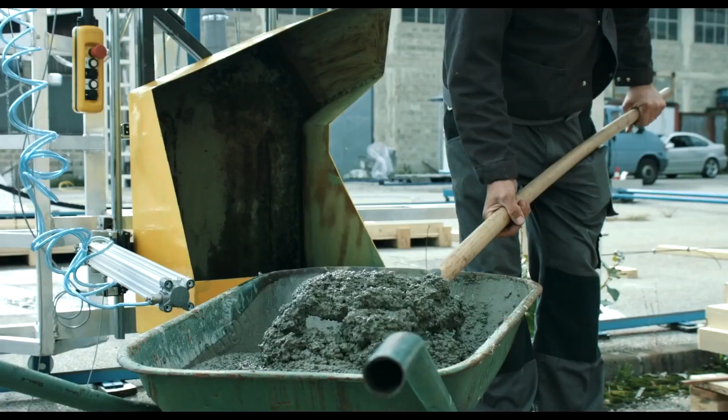The instinct to build a home is a fundamental trait shared by all living creatures, from the most complex mammals to the tiniest insects. Yet, despite man's remarkable capacity for innovation, the core principles of home construction haven't changed since the Middle Ages. It's astonishing that we, as a civilization defined by progress, have not revolutionized the way we construct our homes to become more cost-effective.

However, the future of housing is on the brink of a radical transformation. With a growing number of companies embracing 3D printing technology, the traditional methods of home construction are about to become obsolete. In this video, we'll have a look at how rapidly 3D printed houses are becoming the new normal, and the way we live and build is about to change forever.

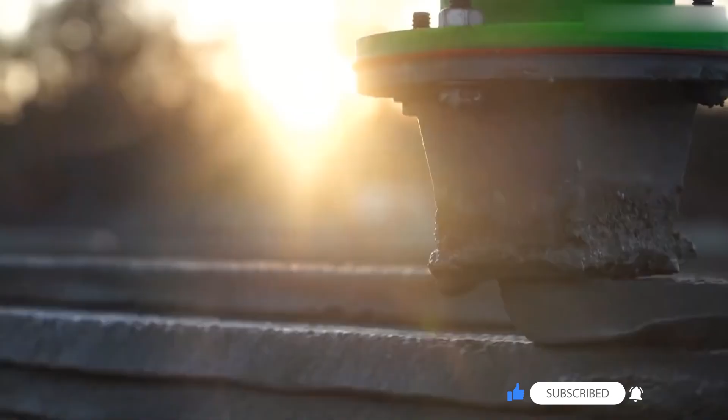The building blocks of 3D homes. Before discussing the recent developments in the world of 3D printing, it's time for a history lesson.

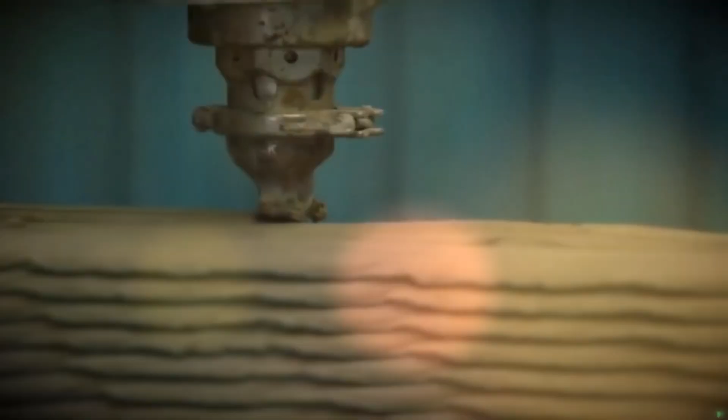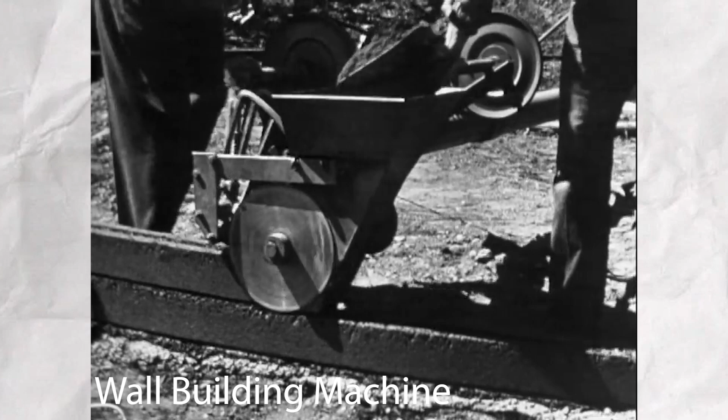Contrary to what many people think, the seeds of 3D printing were sown in 1939 when William E. Urschel created the world's first 3D printed concrete building in Indiana, USA. His innovative wall building machine employed an automatic ramming mechanism to compress concrete between spinning discs, forming solid layers.

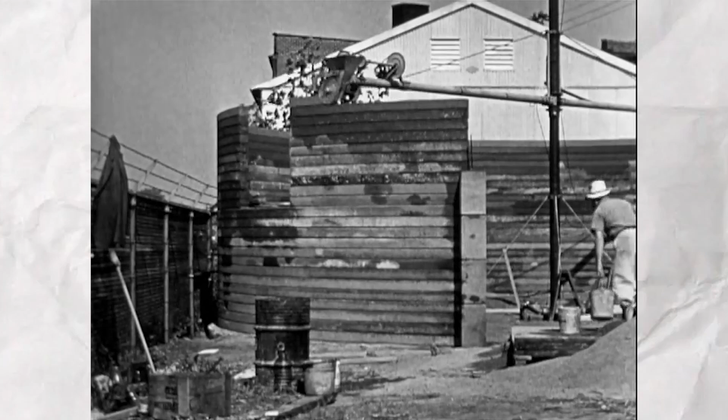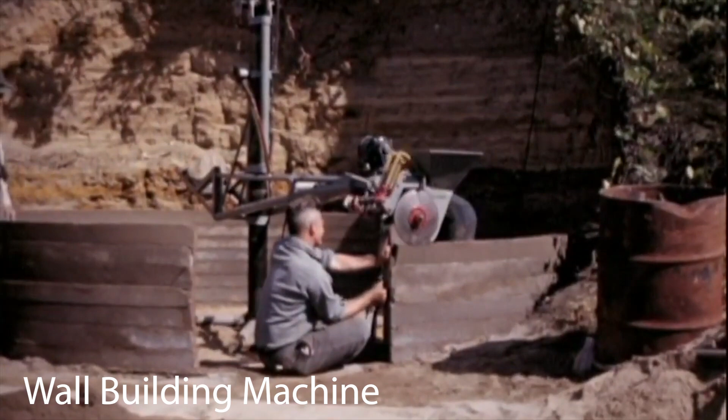This groundbreaking invention pioneered the concept of additive manufacturing, better known as 3D printing. Recognizing the potential for his invention, Urschel swiftly filed patents for his wall building machine just a year later, and his vision extended beyond single-story structures, encompassing multi-story buildings and even self-supporting domes, all fabricated using this groundbreaking method.

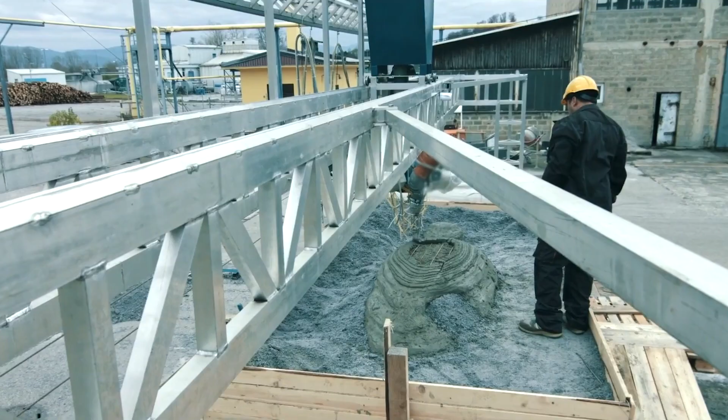While Urschel's work laid the foundation, it was actually the development of inkjet printing technology in 1976 that was a pivotal moment. Both inkjet printing and 3D printing share a fundamental principle: depositing material in precise layers under digital control. This technological advancement later influenced the evolution of 3D printing beyond its early concrete roots.

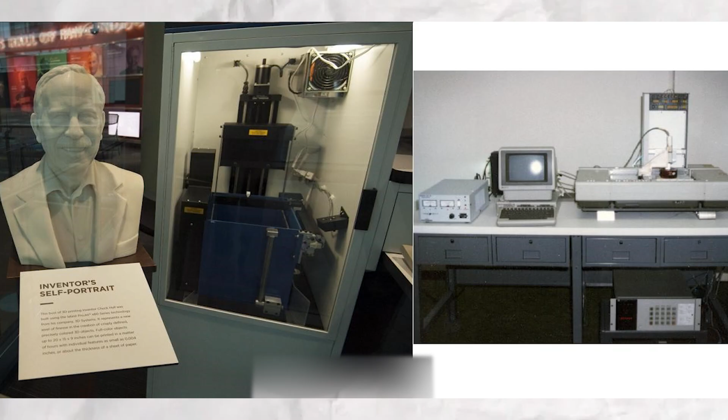However, the real turning point in the evolution of 3D printing came in 1981 when Hideo Kodama, a Japanese researcher, broke new ground by experimenting with materials beyond ink. His work led to the development of two groundbreaking techniques based on photo-hardening plastic polymers.

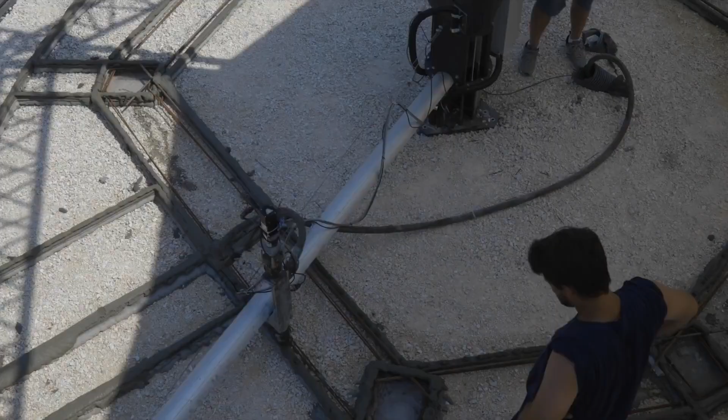Interestingly, one of the earliest applications of 3D printing technology was in architecture itself. During the 1980s, firms began using it to create tabletop-scale models, a more cost-effective and efficient alternative to traditional handmade replicas. In 1984, American engineer Chuck Hull, a visionary who would later co-found 3D Systems, came into the picture and introduced stereolithography.

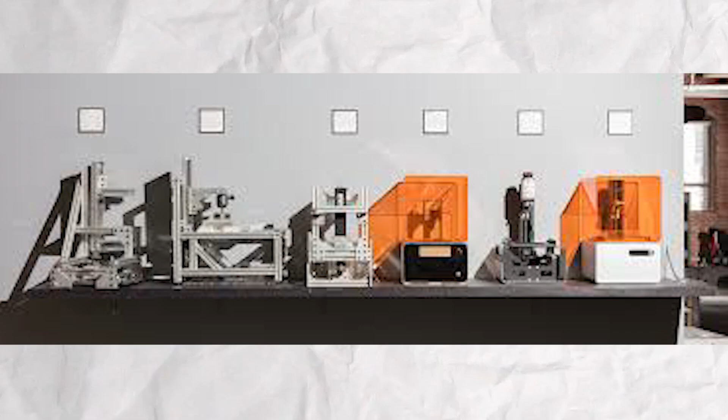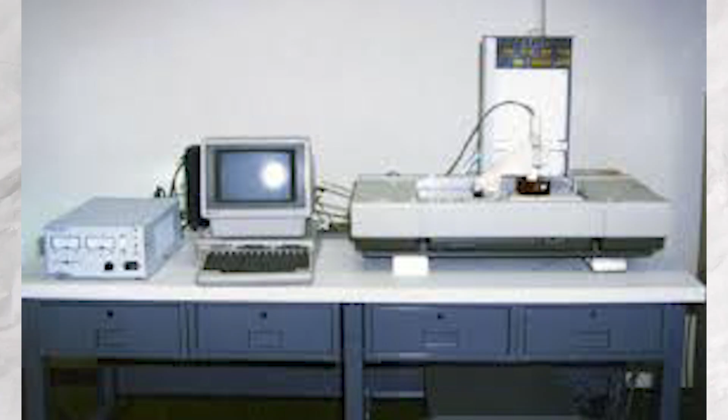This revolutionary process used a UV laser to solidify liquid photopolymer layer by layer, transforming digital designs into tangible 3D objects. Hull even developed the STL file format, which remains the industry standard even today. Building on the success of SLA, Hull also unveiled the first commercial SLA 3D printer in 1988.

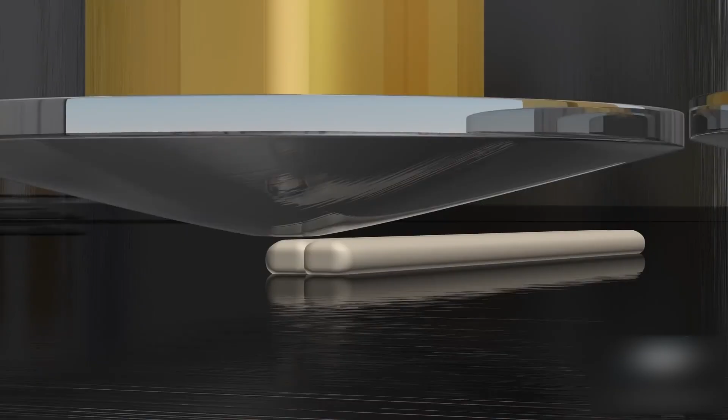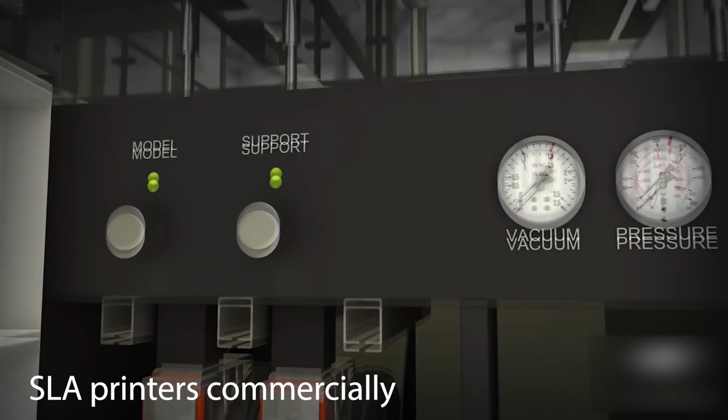And a year later, Scott Crump patented fused deposition modeling, a technique that extrudes melted plastic layer by layer, making 3D printing more accessible to a wider audience. In 1992, 3D Systems launched SLA printers commercially, offering a practical way to create complex 3D objects overnight. While not perfect, this technology marked a significant leap forward.

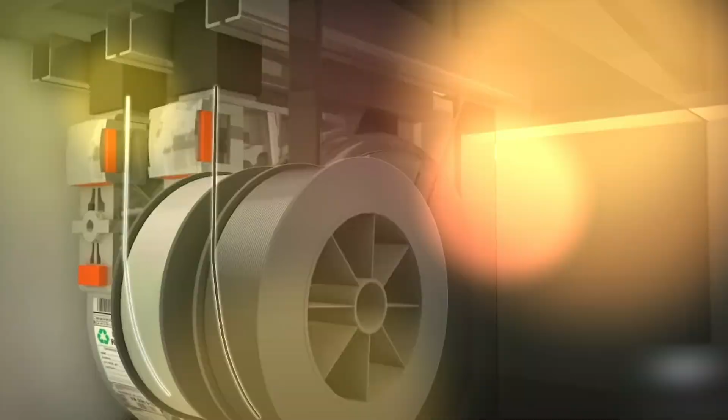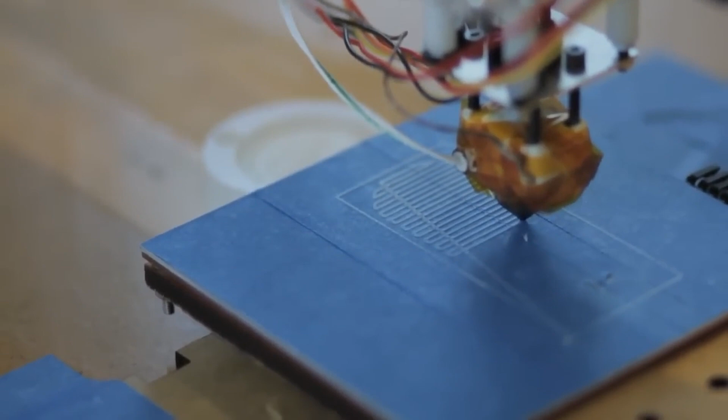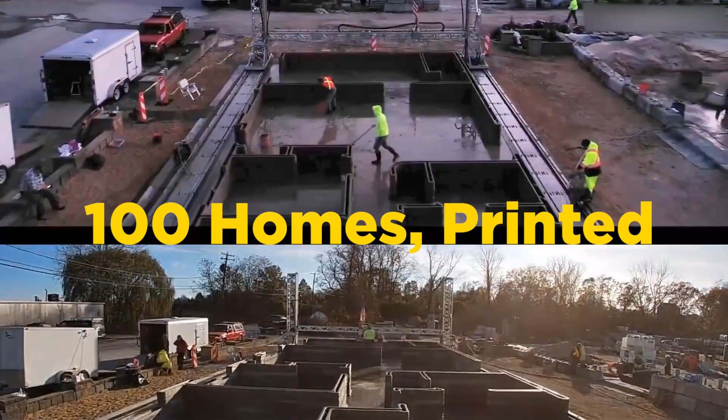The 90s also witnessed the exploration of 3D printing for larger-scale projects. Stratasys also entered the market with commercial FDM printers, expanding options for consumers and industries. MIT researchers contributed to the field by developing their own patented 3D printing system as well. Their system enabled the creation of objects using various materials, including plastic, ceramic, and metal under the guidance of CAD software.

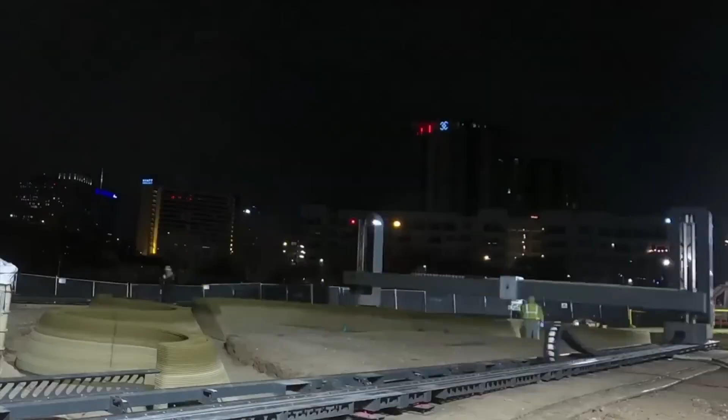100 homes printed. Fast forward to 2024, and there is a whole community of 100 3D printed homes rapidly taking shape in the Texas Hill Country. Located in Georgetown and developed by Icon, Lennar, and BIG-Bjarke Ingels Group, Wolf Ranch is redefining the future of house construction. Situated along the San Gabriel River, these innovative homes, part of the Genesis collection, combine cutting-edge technology with sustainable design.

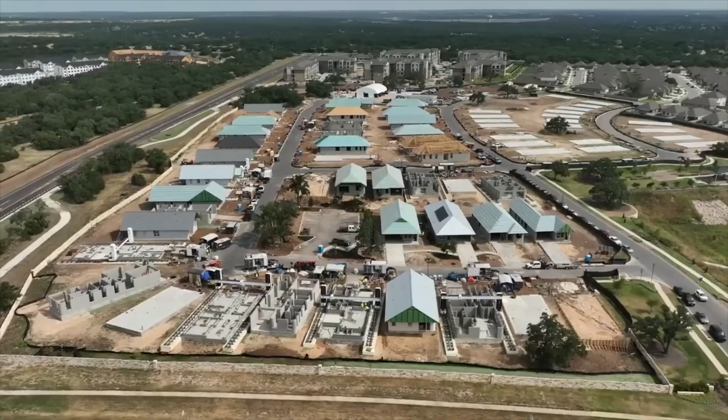They feature 8 floor plans and 24 distinct elevations, and the 3 and 4 bedroom homes range from 1,500 to over 2,100 square feet. The best part is that each home is equipped with rooftop solar panels in order to reduce the environmental impact. Wolf Ranch in particular was chosen for 3D printing because it's an opportunity to showcase the technology's potential to save time and money, reduce waste, and create innovative homes.

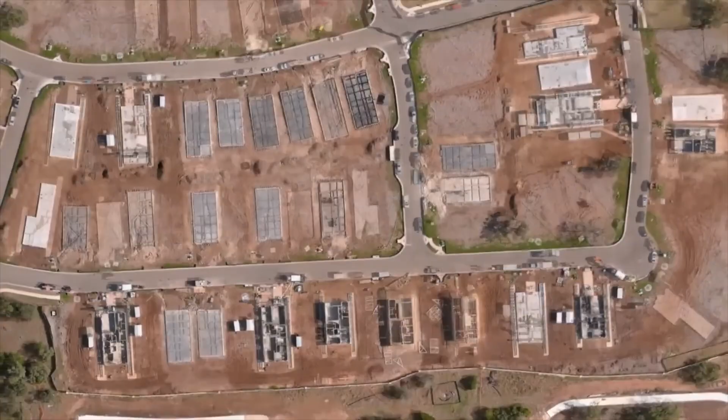With construction almost in its final stages, built entirely with 3D printing technology by Icon, it has been reported that over 95 homes have already been printed, and over a quarter of them have found new owners.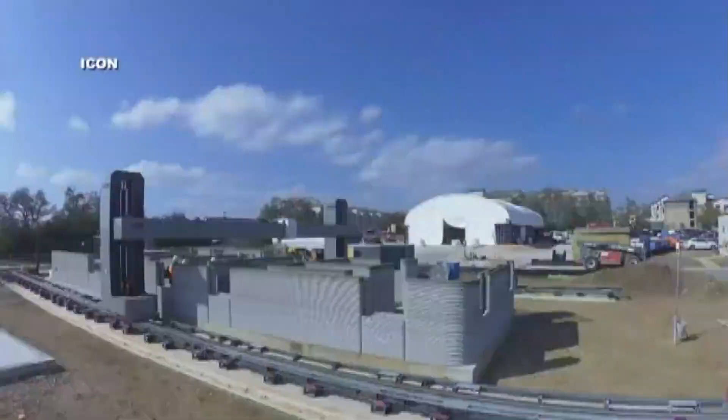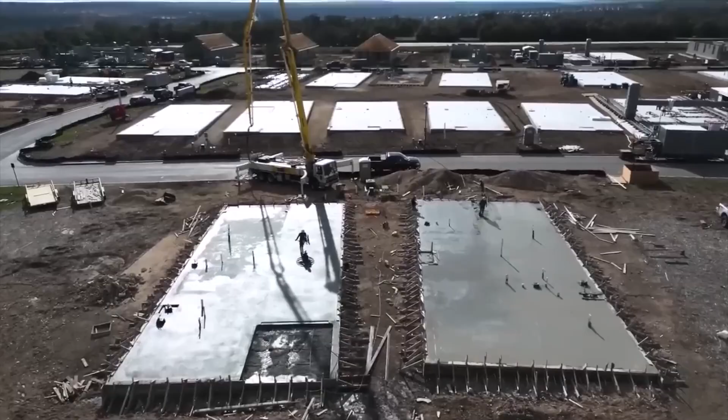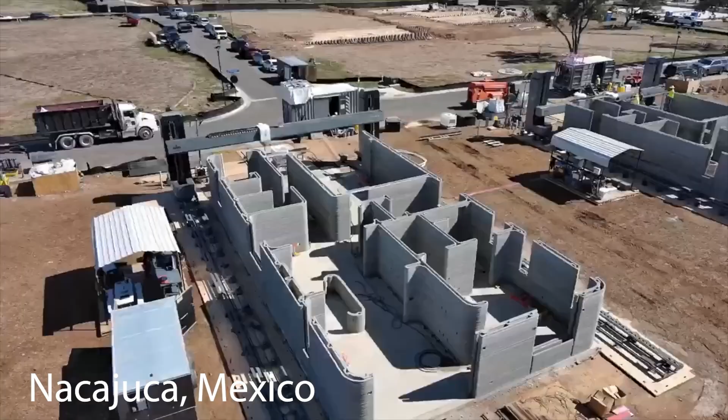The Genesis Collection isn't the only residential construction project of Icon. From the experimental House Zero to the Chicon House, these projects represent different approaches to utilizing 3D printing in the housing sector. Other notable projects include El Cosmico, East 17th Street Residences, and Community First Village, plus 3D printed homes in Nacajuca, Mexico with New Story. Each project offers unique insights into the potential of 3D printing to revolutionize the construction industry.

The future of housing is here. But that's not the coolest part.

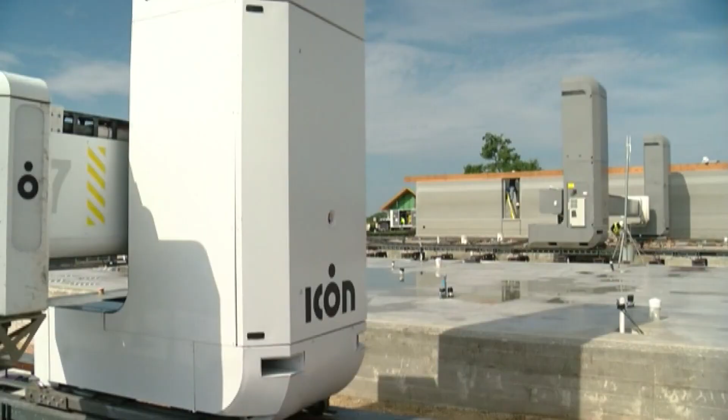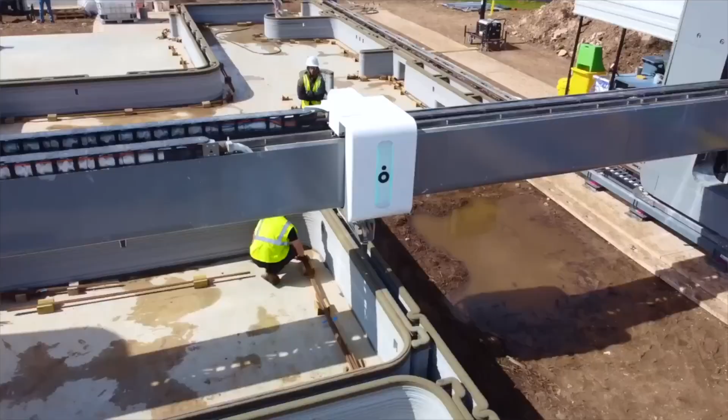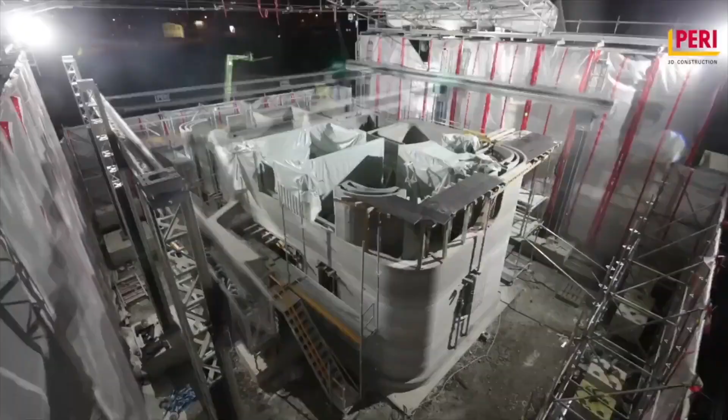It's Icon's massive Vulcan printer, which is 45 feet wide and weighs 4.75 tons, and emits a concrete-based material layer by layer to create the homes' sturdy walls, which reduces construction time and minimizes waste. The resulting homes are not only faster to build, but also boast superior insulation and resistance to weather, pests, and mold. The printer is designed to be quickly transported from site to site, and it prints directly on the ground or a poured slab.

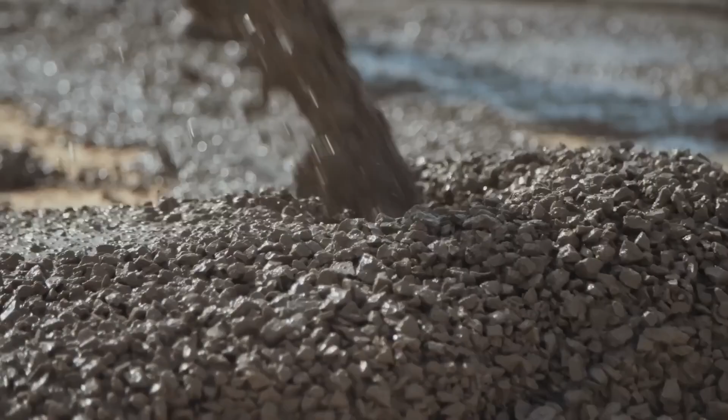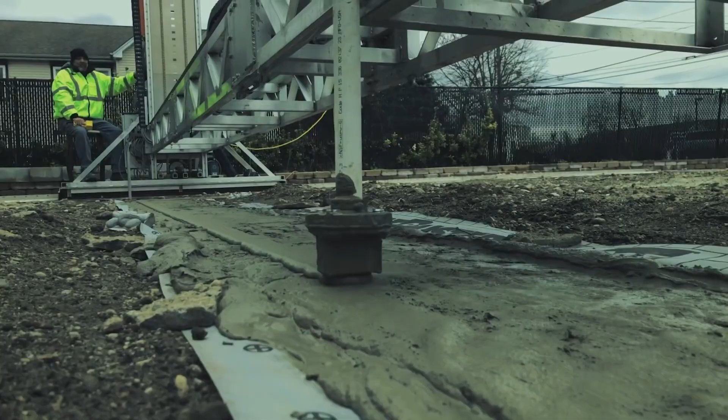The printers use a special building material called Lavacrete, which is mixed by another machine called Magma, and the whole process is controlled by the Build OS software suite that turns digital house plans into real homes. A game changer for construction.

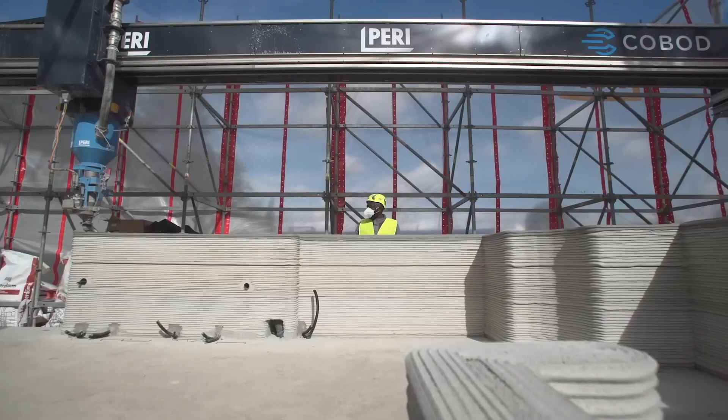One of the most compelling advantages of 3D printing is speed, because unlike traditional building methods that can take months or even years, 3D printing can produce entire structures in a matter of days.

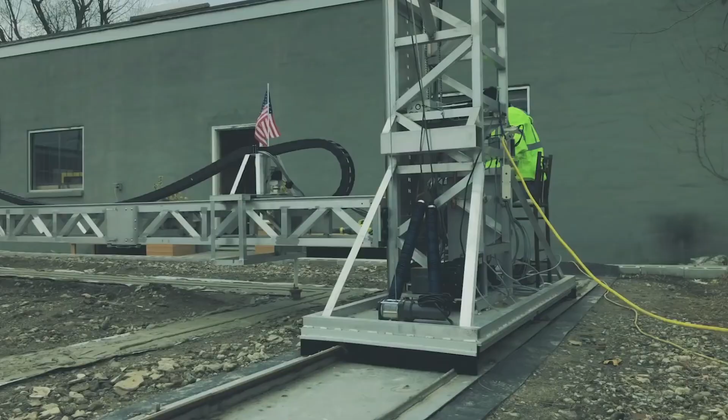Beyond speed, sustainability is another key benefit. 3D printing minimizes waste by using only the necessary materials, resulting in a reduced environmental impact. Additionally, the technology can incorporate recycled or sustainable materials, further enhancing its eco-friendliness.

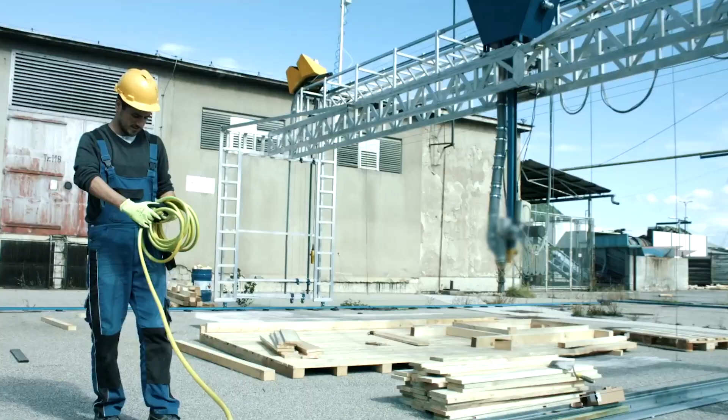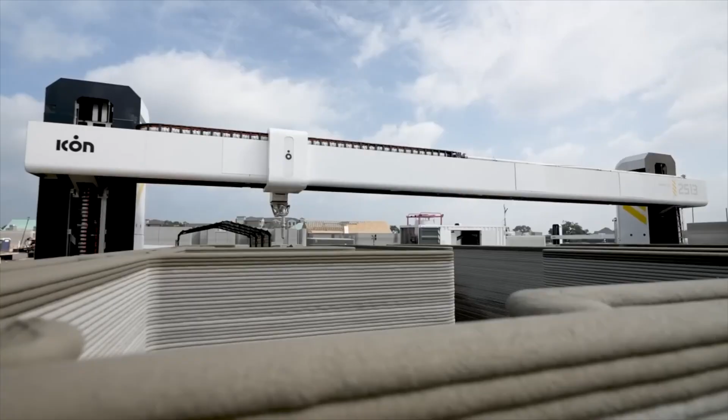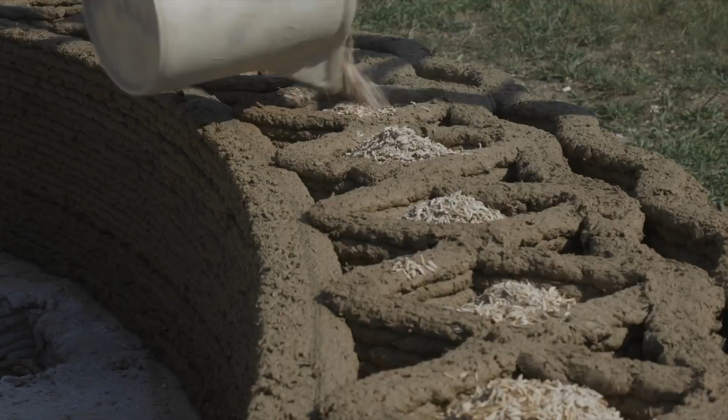Design flexibility is another hallmark of 3D printing, as it allows architects and engineers to explore intricate and complex forms that would have been impractical with traditional methods. 3D printing also ensures that structures can be built to exact specifications, ensuring accuracy and quality, and now with the integration of artificial intelligence, there are even more possibilities to optimize designs, predict material usage, and control the printing process, leading to more efficient and cost-effective construction.

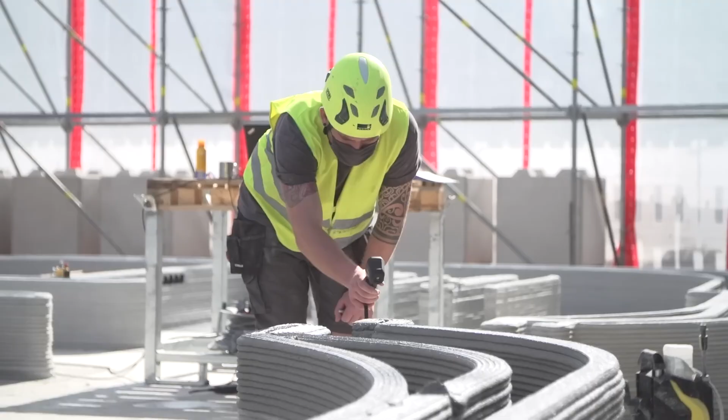The reality check: however, while these homes offer numerous advantages including cost efficiency and durability, one unexpected challenge has emerged. The thick concrete walls can interfere with wireless signals, forcing residents to opt for mesh Wi-Fi systems to ensure reliable connectivity throughout their homes.

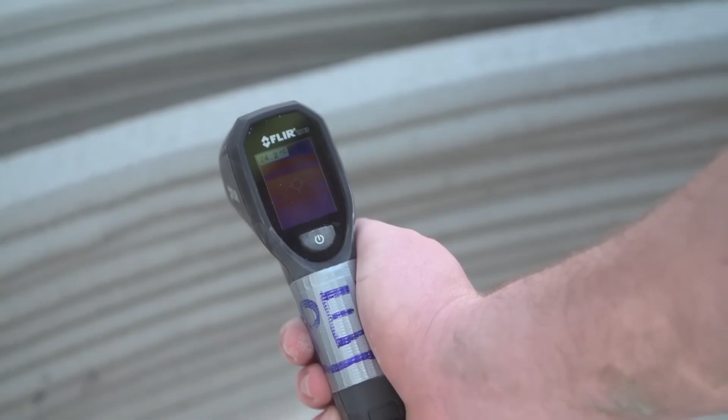This technology could be a game changer for places like Maine, which faces a severe housing shortage. The state needs around 80,000 new homes by 2030, and 3D printing could help address this crisis rapidly and efficiently.

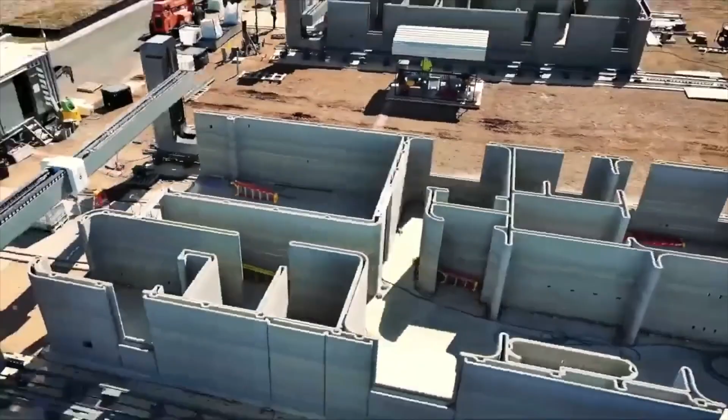While these 3D printed houses sound like a dream, the price tag on them would make any normal buyer nervous. They're priced competitively at $470,000 to nearly $600,000, making them affordable but only for people with a specific level of income.

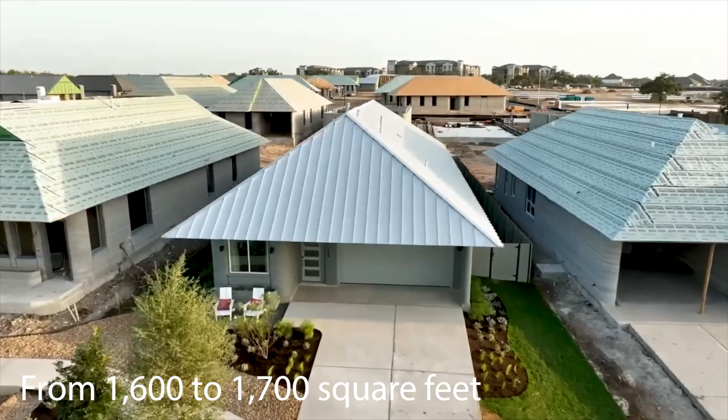And with these prices, questions like could 3D printed homes help address global housing shortages and homelessness can be answered pretty easily. When compared to traditionally built houses, there is a huge difference in cost. It costs around $325,000 for a newly constructed entry-level home in Texas, typically ranging from 1,600 to 1,700 square feet, while the same can't be said about the 3D printed houses in Wolf Ranch.

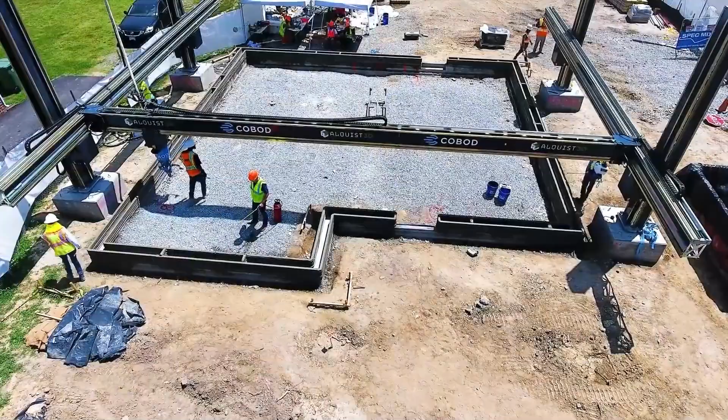Outro: while these 3D printed houses represent a significant leap forward in construction technology, their current costs put them out of reach for many. As technology matures and production scales, it's anticipated that the cost of 3D printed homes will decrease, making them more accessible to the broader population. This potential for cost reduction, combined with the numerous advantages of this construction method, positions 3D printed housing as a promising solution to address global housing challenges in the future.